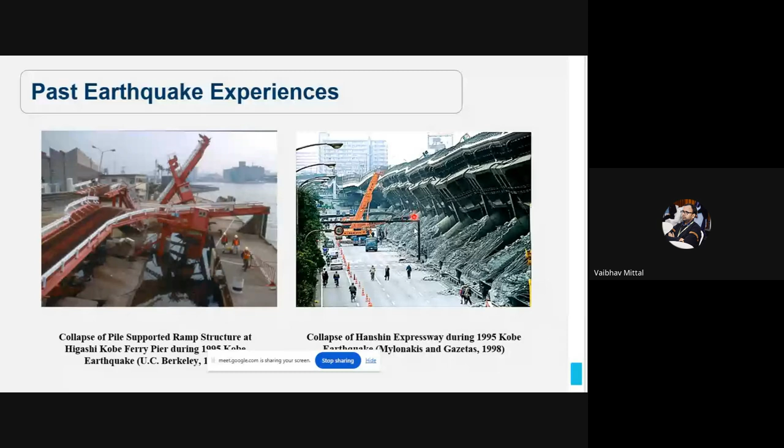Period lengthening means resonance occurred, resulting in the collapse of the Hanshin Expressway. A portion of the expressway collapsed during the Kobe earthquake. Similar observations were seen during the 2015 Nepal earthquake, where non-consideration of foundation effects caused buildings to collapse.

So what is this exercise basically? So far I was talking about experiences from previous earthquakes. Now, what do we basically do? This is the conventional approach which we used to follow.

Whenever we design any structure, we design it by assuming a rigid condition, meaning we consider it as a rigid base. But in actual conditions, are these the same? No, they are not the same, because the available soil condition, the foundation system, and the stiffness of these two bodies are completely different from the rocky strata.

Suppose an earthquake comes in this case, and an earthquake comes in the other case—then the response of our structure will be completely different in comparison to the other one.

The performance of the building is basically obtained on the basis of the FEMA code. FEMA code says that the performance level of a building can be specified on the basis of qualitative and quantitative levels. The term used to describe the performance level quantitatively is interstory drift.

They have given certain values for interstory drift, based on which we can decide whether the building is safe or not. They have given 5 performance levels: fully operational, occupational, life safe limit, collapse, and nearly collapse condition. It is observed that as per the code, if the interstory drift of the building crosses 1.5%, it is said to be under the life safe limit.

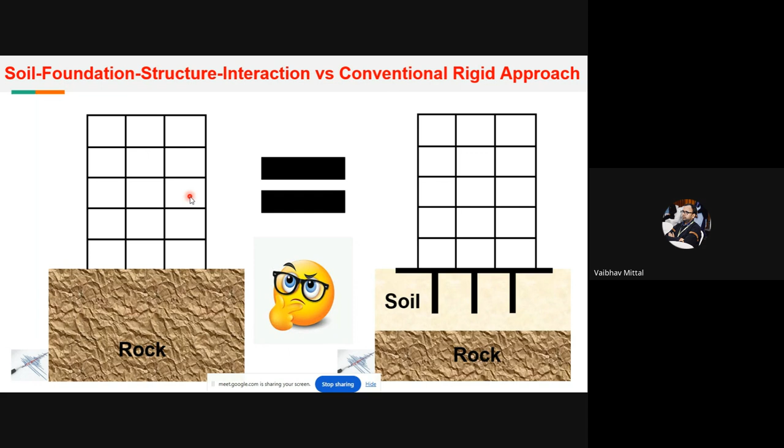And if it is crossing more than 2.5%, it is under collapse condition. This can be understood from the next slide also, more properly.

Because in this case, the stiffness of rock is very high. If stiffness of rock is very high, it will not lead to development of transverse shear and overturning moment. That is why the building response is found to be safe.

But as soon as soil will come into picture, what will happen? Depending on the frequency content and characteristics of the soil, amplification may occur.

Now suppose we are doing an excavation here, for a foundation system. As soon as you are doing excavation, what will happen? Just picturize this one in your mind.

Suppose your foundation is there. The soil will try to do a certain response, which is basically the free field response. So soil will try to follow a free field response.

But due to the stiffness of the foundation, it may not follow this free field response. The inability of the foundation to follow the free field response is known as kinematic interaction. Once we are considering the inertial effect of the structure and foundation, then what will happen?

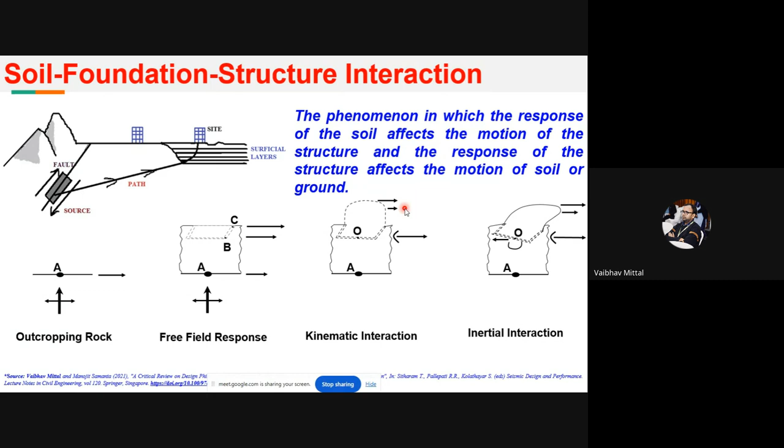So basically, these two interactions, kinematic interaction and inertial interaction, are two types of soil foundation structure interaction. So what is soil foundation structure interaction? The phenomena in which the response of soil affects the motion of structure and vice versa is known as soil foundation structure interaction. This can be understood from the animated slide we have made.

Because due to development of overturning moment, this foundation will rock. So rocking of foundation is basically playing an important role in the increment of lateral displacement of the building.

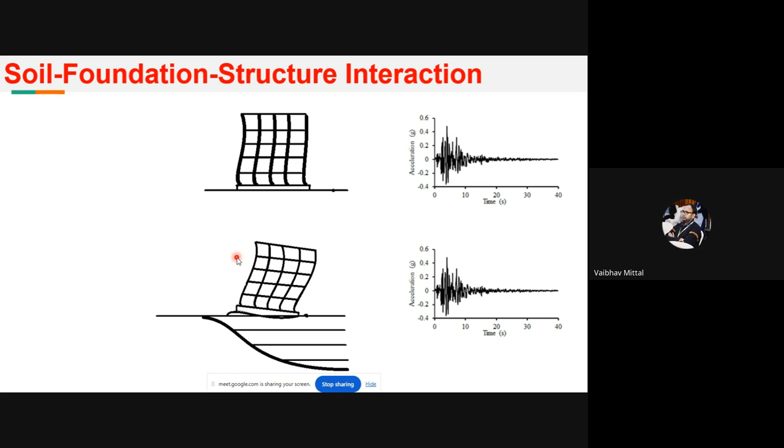So what are the several parameters which are affecting this response? First is the foundation, under the available site condition, the configuration of structure, because this is a regular structure. If irregularity is there in the building, again SSI will be more in nature. And also the input ground motion.

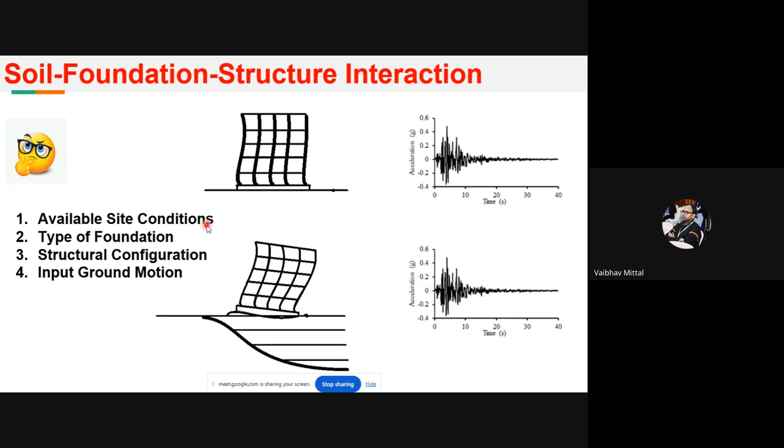So there are several other parameters like local site effect. If I'm talking about the single point, local site effect is playing an important role in influencing the seismic response of the system, that is basically your structure and foundation. Now coming to the codal provisions.

So regarding the Indian code, IS 1893:2016, as per clause 7, it states that SSI may not be considered for structures supported on rock or rock-like material under any earthquake disturbance. For this consideration, they have given a time period equation for a moment resisting frame building, that is an RCC building: T equals 0.075 h raised to the power 3/4. This is the equation given by the IS code.

But as we know, India is a developing country, and due to increase in population and urbanization, we won't everywhere get a rock-like condition. So we need to construct structures where soil is present. How do we consider this in design? This can be understood in the next slide. I will show the general approach first, then come back to this slide.

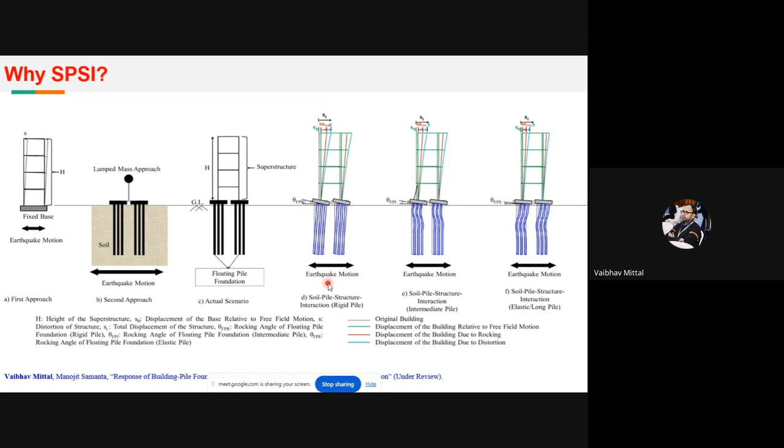Now suppose this is a single structure, and I am designing it corresponding to this lateral displacement, with another structure adjacent to it - this may cause a pounding effect. It may affect the surrounding structures and also its own performance. That is why we should consider the effect of soil-foundation-structure interaction - instead of designing the structure and foundation separately, we should develop a methodology using coupled analysis. That is the importance of SSI over a rigid stratum.

Now coming back to the previous slides I was mentioning. The Indian code is basically silent about all these things. Although the new drafted code has given certain guidelines, there are still several things that need to be considered. Another code, ASCE 7-16, talks regarding SSI - a few points they have considered, like mentioning where we should consider the effect of SSI.

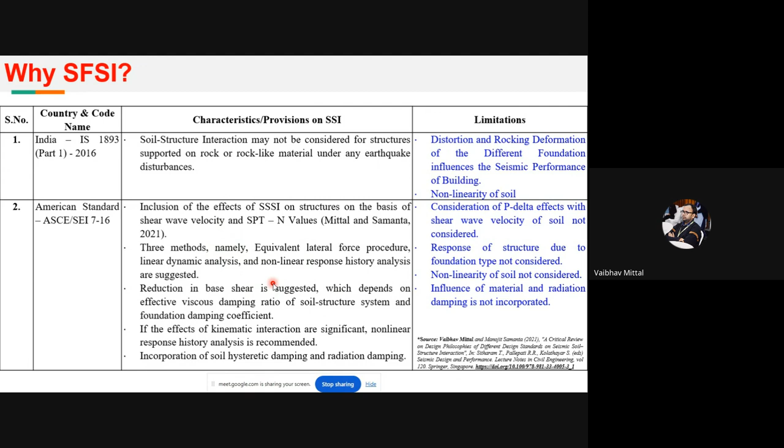They have also given a few methods, but if a building is supported on an isolated footing, a raft footing, or a pile foundation, depending on the foundation type, the structural performance will change. How the foundation affects the structural response is not being considered in the ASCE code. This was the reason I conducted this research using experimental investigation and numerical investigation, that is Abaqus.

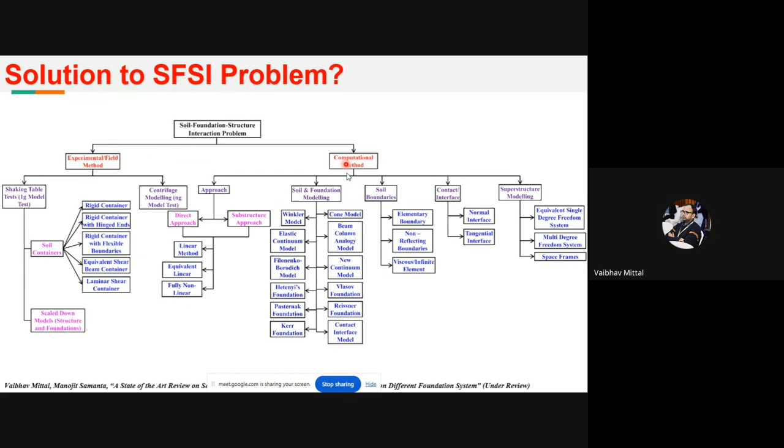So what are the solutions to the soil-foundation-structure interaction problem? There are two methods: experimental method and computational method. In today's class, we are going with the computational method, that is also the direct approach. So we will go to the direct approach.

What is basically direct approach? In direct approach, what we used to do - now in actual condition, soil is wide, soil is an infinite media. But whenever we are doing modeling in Abaqus or any finite element software, we are using a finite media. So in direct approach, we will construct this structure, foundation, and soil in a single system.

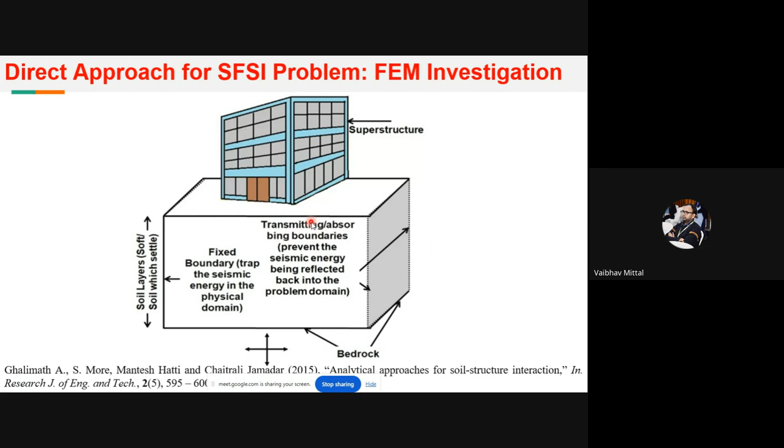However, in case of substructure approach, there are two approaches: direct approach and substructure approach for an SFSI problem. In substructure approach, instead of modeling this complete system in a single body, I will discuss in more detail in the upcoming slides. That is why I have discussed this one briefly, because this is the aim of today's webinar, and we will discuss it in more detail later.

In substructure approach, what we are doing - this is my complete solution. So first, in the first approach, I will not consider the mass of the foundation and structure. I will just follow the kinematic interaction, meaning I will try to find the foundation input motion.

Once this foundation input motion has been obtained, then in the second step, I will try to find the impedance functions. These impedance functions and foundation input motions are applied at the base of the structure to obtain the seismic performance. So this is the substructure approach.

Now, people can ask which approach is better. If you are following a direct approach, the computational time will be more. If you are following the substructure approach, computational time will be less.

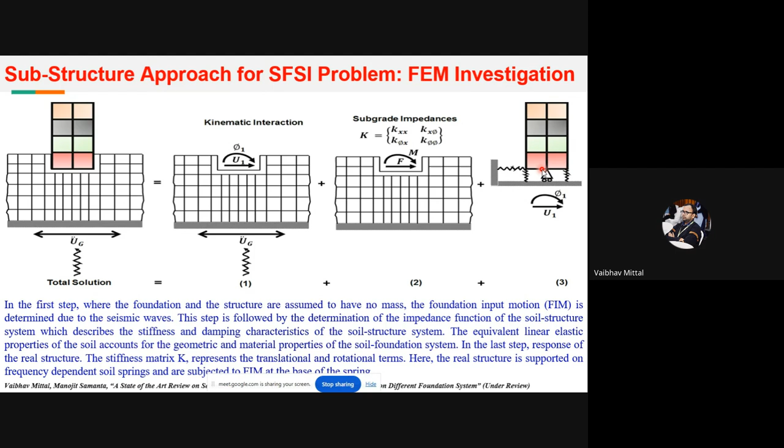But again, although we are using this kinematic interaction, foundation input motion, and impedance function at the bottom of the structure, we are still missing the foundation effects because there are shadowing effects, and how the foundation will interact is not fully captured. So these things are not considered in the substructure approach. That is why the direct approach is generally more widely considered for solving SFSI problems.

So this I have already discussed. Now moving to Abaqus numerical modeling. First of all, whenever you are doing any Abaqus modeling or finite element modeling - whether it's a structural engineering problem or just a geotechnical problem - Abaqus does not know which unit you are using. If you enter anything, it will just give you the numerical value; it does not know what unit you are entering.

So it is the user who should understand what unit system to follow. For example, if I am following SI units, length should be in meters, force should be in newtons, mass should be in kilograms, time should be in seconds, stresses should be in newton per meter square, energy should be in joules, and density should be in kilogram per meter cube.

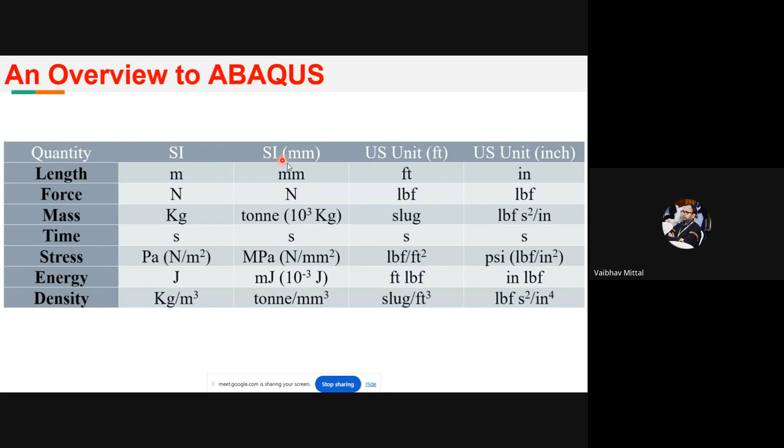The common habit of a geotechnical person is to use kilonewton per meter cube for density, but we should use kilogram per meter cube in Abaqus. If you are modeling in millimeters, then your density should be in ton per mm cube, mass should be in tons, and stresses should be in megapascal. These are the unit systems you should keep in mind whenever doing any modeling in Abaqus.

Once you open your Abaqus model, it will look like this. This is the toolbar. Abaqus has several features, and the first one is basically Parts.

Since today we are dealing with a soil structure interaction problem, we have several components - the superstructure, the substructure or foundation system, and the soil. So in Parts, we will create these separately.

Then after that, we need to assign the properties, and in the Assembly module, we will assemble them completely. Then we need to follow the Steps function - Steps meaning what kind of study you are going to do. For example, if you want to perform dynamic analysis, you need to provide a dynamic step.

If you perform a static analysis, you should define your steps here. In field output request, we need to select the variables. Like if I want displacement, I will select U. If suppose I want acceleration, I will select A. So whatever variables or results I want, I will select in field output request and history output requests.

Then in interaction, we will define the interaction, meaning the contact, because there is a foundation, there is a structure, and there is your soil. So what we need to do is define the contact between the foundation, the soil, and the structure to simulate soil foundation and structure interaction problem in Abaqus.

Then your next step is your loading. In loading, whatever different kinds of loads are there, you need to assign those. And then you need to assign your boundary conditions. Then we need to do the meshing. Once all these things have been done, we can run the analysis. And after running the analysis, we will get our results.

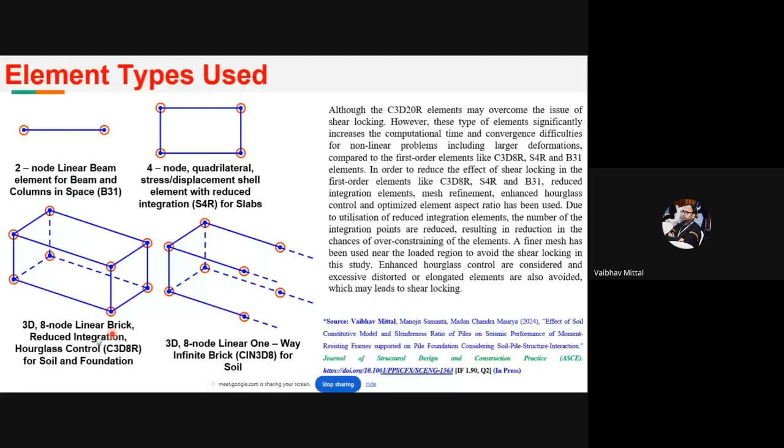Another thing is we are using different types of elements like reduced integration, hourglass control. These are different things which we should consider in Abaqus. These details can be obtained in one of my papers, already published in the Journal of Structural Design and Construction Practice. You can see this paper to understand the usage of reduced integration and hourglass control for modeling in Abaqus while doing any SSI problem.

Now moving to the first part, how a superstructure has been modeled. So in the superstructure, how do I need to model that? I will use 3 things. First is your beam, second is your column, another thing is your slab. So I need to model 3 things.

As I mentioned, beams and columns are modeled using 2-noded linear beam elements with 6 degrees of freedom, while slabs are discretized using quadrilateral shell elements with reduced integration.

Another thing is that in this study, whenever you are doing any superstructural modeling, you need to provide certain properties. So you can provide linear elastic properties, or you can also assign plastic properties. But in this study, I'm only providing the linear elastic properties. If someone wants to assign plastic properties, they can go with concrete damage plasticity, if they want to see how the damage occurs.

Another important point whenever we do any such studies is the damping ratio. As per IS 1893 code and ASCE 7-16, I have taken a damping value of 5%. So a structural damping of 5% has been taken, depending on the study by Chaudhary and Dasgupta, which is why we have taken this 5% damping.

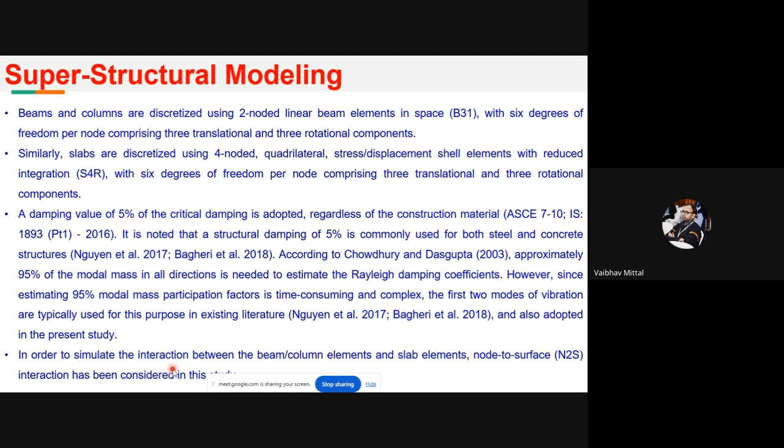Another thing is that when we have modeled these beams, columns and slabs separately, we need to provide an interaction between them. For that, we are using a node-to-surface interaction between the column and slabs. And once we have done this, we get a modeling like this one.

So you can see these are linear elements. These are the beam elements we have used for the column, and similarly for the beams. And then these slabs are resting over this. So what we have done, just try to imagine this thing.

I will use a pen here to make you understand. So suppose this is your frame, any frame. I am supposing I have taken one frame, and I will change the color also. Suppose this is one, here's one slab.

So basically what we have done, we have taken the connections here. This interaction we have provided between beams and columns, and another interaction is provided between this surface. The red color is for your beams, and the blue color is for your slab. Between this we have provided an interaction.

For that interaction, basically what we are following is we don't want a relative motion between them. So if you do not want any relative motion between them, you should provide a tie constraint facility available in Abaqus. This tie constraint is basically used if you do not want any relative motion between different parts. That is why we are providing the interaction as node to surface.

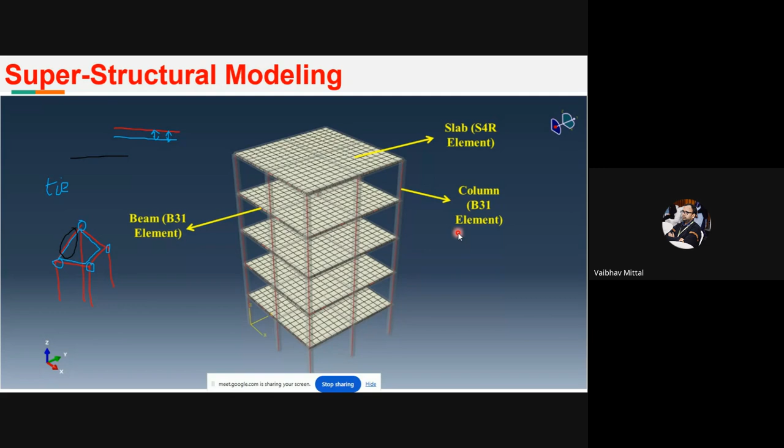So what is the reason behind that? That is also being investigated in the study.

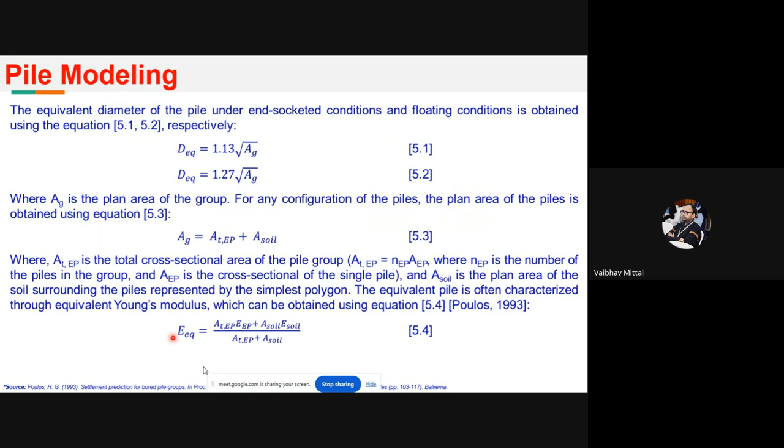Another thing is, whenever doing this kind of study, basically what we are doing is avoiding the shadowing effect. To avoid this, we have taken equivalent Young's modulus also, obtained from this equation. So these two properties have been taken for pile modeling, and we have modeled it like this.

Now, whenever we are doing any pile modeling, we should know there are several things we want to know: the bending moment, the shear force, the lateral deformation. Now this is the disadvantage, if we can say, or there are several ways by which we can do this modeling in Abaqus.

You can use a wire element, you can use a solid element, but with each type of modeling, there are certain disadvantages involved. Like if suppose I am using a beam element instead of this solid element, what will happen? Obviously, the number of elements will be less.

Then obviously what will happen? If the number of elements are very less, then obviously your computational time will reduce.

But in that case, there is another problem, because the pile is surrounded by soil. There are frictional resistance offered by the surrounding soil, and there are end bearing resistance that cannot be modeled when using a beam element. So if I am using a beam element, this is the benefit and this is the disadvantage.

Another benefit with beam element is: if I am using beam element, I can easily find the bending moment, shear force, lateral deformation, everything. But we cannot simulate the interaction between the surrounding soil and the pile.

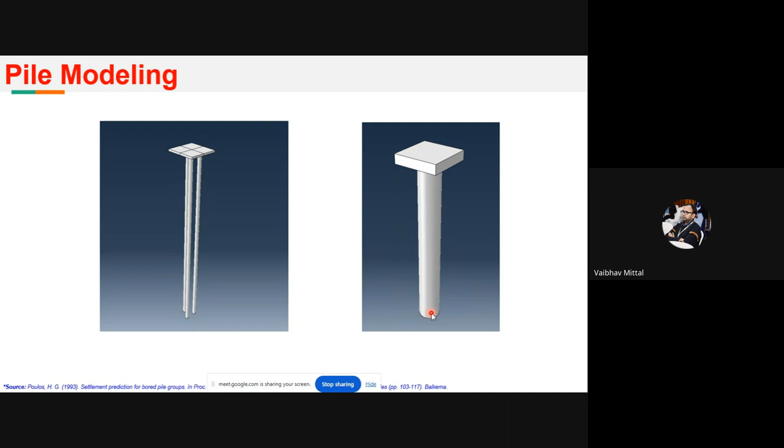Or to overcome this, there is a technique where we use a combination of beam element and volume element. So what we are doing is modeling the pile foundation as a volume element, and to find the bending moment and other things, we are using a beam element, which we embed in this solid pile.

For that, we need axial rigidity and flexural rigidity, which we assign, so that the pile can simulate the interaction, that is the frictional forces and end bearing resistance, and we can also get the bending moment. So for the volume pile, I'm using this element.

So once we have done the modeling, you will see this. The outer one is basically your volume pile, and to estimate the bending moment and other things, we have embedded a beam element inside this one.

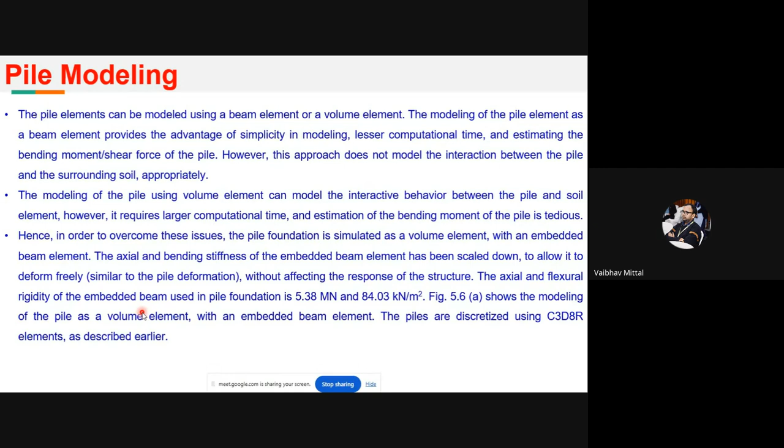The beam element properties are: the axial rigidity and flexural rigidity of the embedded beam have been assigned, so that this embedded beam is also deforming similar to the pile only. So in this way, we have done the modeling of pile in Abaqus. This is the pile modeling you can see.

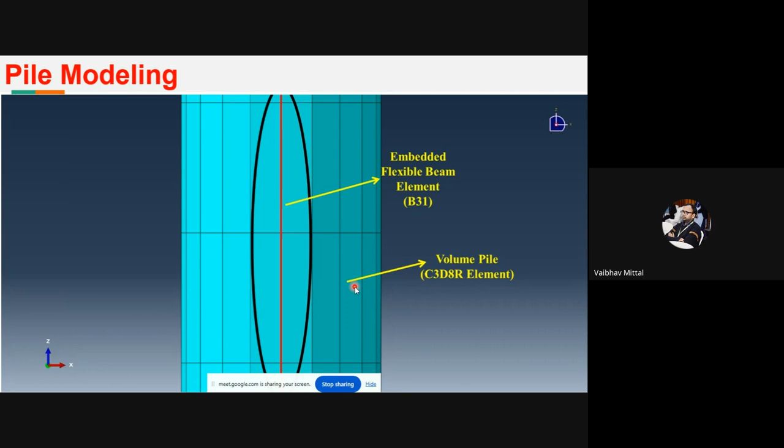Another thing that might come to your mind is how pile foundation modeling will be different from pile raft. We will see in the upcoming slide how that modeling has been ensured, how I have ensured these piles are behaving, means these caps are not taking any load, because in pile raft we know a small amount of load will be taken by raft and another amount of load will be taken by piles.

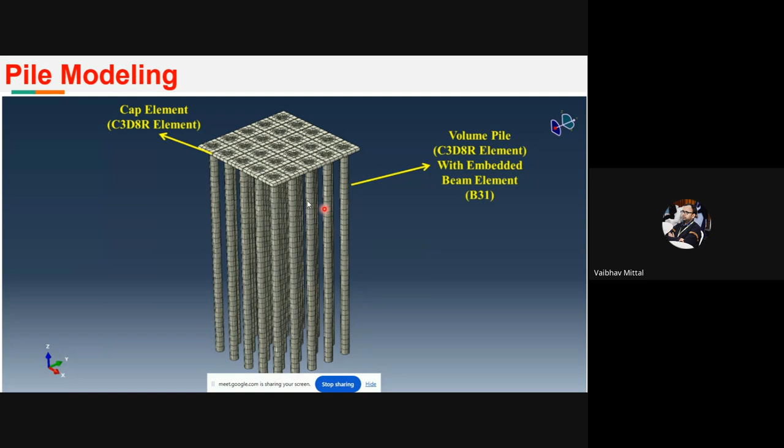In case of pile foundation, all the loads are generally taken by piles only. How this action has been ensured in Abaqus, we will see in the upcoming slide.

Whenever doing soil modeling, the common methodology is to use constant Young's modulus values, without considering dynamic characteristics. But in actual conditions, during an earthquake, depending on the characteristics of the earthquake, the strain level will differ, and depending on strain level, there will be degradation in the soil, and its damping ratio will also change. So we should consider this non-linear characteristic of soil.

Whenever doing any dynamic study related to soil, we should consider the shear modulus degradation curve, and we should consider the damping degradation, that is the damping variation with respect to cyclic shear strain.

For that, we have developed the UMAT model with these different parameters, through which the non-linear characteristics of the soil have been incorporated in Abaqus. Proper calibration has also been done before using this soil model for my study.

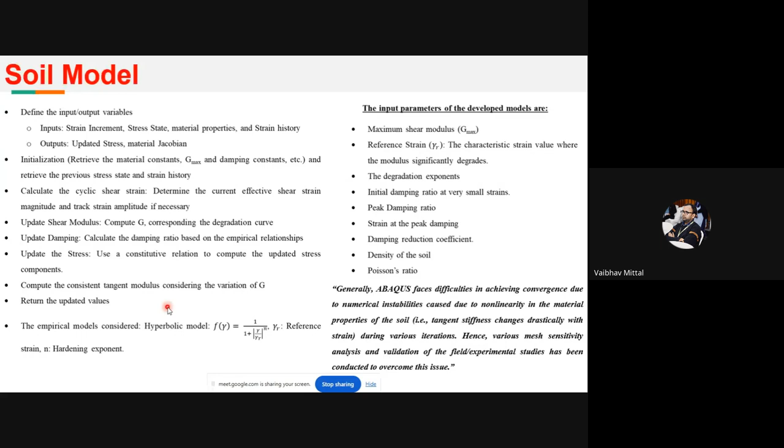As mentioned, we are using a dynamic study, so for that I have taken these 4 different types of earthquakes. Today in this class, we are going to discuss only the Imperial Valley earthquake.

Whenever doing any kind of study in Abaqus, one should ensure that whichever earthquake data you are using, it should be recorded at bedrock level, not at the soil level. Because if you take data recorded at the soil level, it will already be amplified. So if you have data from soil level only, you need to perform deconvolution to get the raw data.

All this data has been obtained from PEER, which is a strong motion data database where you can get these records. We have taken 4 different datasets: Imperial Valley, Chichi earthquake, Tohoku earthquake, and Kobe earthquake.

Why have I taken these 4 earthquakes? Because there are several parameters - intensity, duration, hypocentral distance, magnitude - that will affect the seismic performance of a building. Depending on that, we have taken these earthquakes.

If I'm providing the full duration of each earthquake, it will take so much time. Instead, there are two things you can do - either provide significant duration in Abaqus, or provide bracketed duration. In my study, I have used bracketed duration.

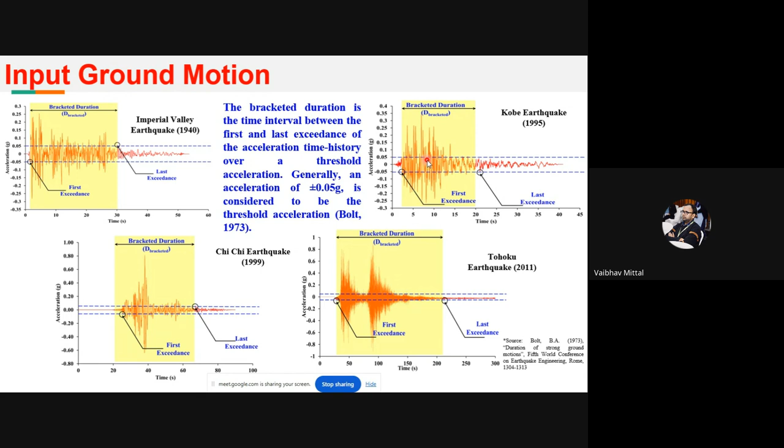Whenever doing any modeling in Abaqus, we understand we will create different parts - a foundation, a structure, and soil. Now another thing is how we decide the interface. In the structure, I showed you that the interface is done by providing a tie constraint.

But in case of piles and surrounding soil, a frictional force and an end bearing resistance are present. So what is the ideal characteristic? When separation is zero, there should be no contact pressure.

As soon as there is no separation, meaning the pile is touching the soil - keep in mind this is shown at a microscopic level, which is why you see a gap here, but there is actually no gap available. So what basically is the ideal characteristic?

When you apply the load, what will happen automatically? There is no separation, so the contact pressure should be maximum. But in actual conditions, we can't get the ideal characteristics. So for that, we use this characteristic available in Abaqus.

This characteristic is known as hard surface to surface contact. Since my pile has larger stiffness, meaning it's more rigid than the soil, the pile acts as the master surface and soil acts as the slave surface. To simulate frictional forces and end bearing resistance, we provide hard surface to surface contact using normal interaction, and for frictional behavior we follow tangential interaction using the penalty method available in Abaqus, where we provide the friction coefficient, details of which are given in my paper.

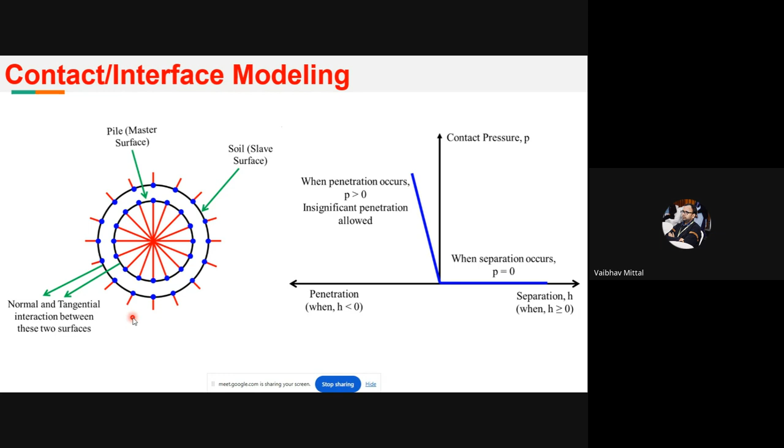The details of the paper are in the last slide of this presentation, so you can get that there. Now this is the complete modeling which I mentioned here.

First, as I mentioned, whenever we do any kind of soil model, we should ensure that the soil is infinite. So in the direction of shaking, we have provided infinite element, CIN3D8, and then for the pile and soil, we provide the interaction as normal and tangential interaction.

One more thing, if you see clearly, this pile cap is above the ground. The major function of a foundation is to transfer the load to the surrounding soil. Since this pile cap is above the ground, it won't transfer any load. So all the loads will be taken by the pile. In this way, the simulation of pile foundation has been taken care of during the modeling.

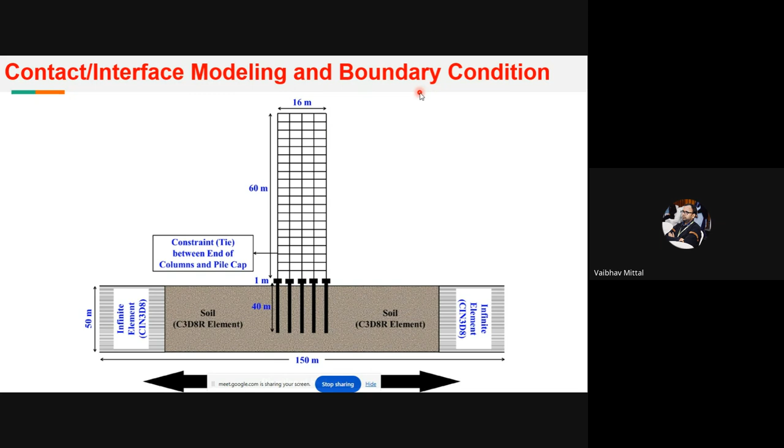In this direction and the opposite direction, out of plane rotation has not been allowed. One major mistake people make when doing soil modeling is using the default view of Abaqus. If you use the default view, the depth will be in the y direction. But what we should do is ensure this is the global XYZ axis, so depth should be in that direction.

Now another point for numerical modeling - so far we've understood the different contacts we need to provide, different properties, and different boundary conditions. Another thing which will influence your computational time is your meshing, so you should perform a mesh convergence study.

But before the mesh convergence study, since this is a dynamic problem, there is a criteria called the Lysmer boundary condition, or Kuhlemeyer-Lysmer boundary condition, corresponding to which we should ensure the mesh size is appropriate relative to the wavelength of the seismic wave. After that, once you have obtained your mesh size...

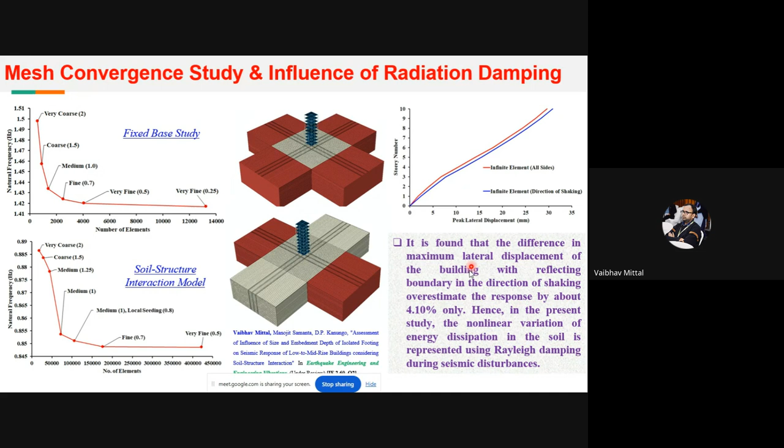Here you can see, although the result difference is very small, about 4.10%, the computational time for this analysis took more than 4 to 5 days, whereas this one I am getting in 2 days only. So instead of using infinite elements in all directions, I will use only the direction of shaking, because the error percentage is still less. That is why I have used infinite elements in the direction of shaking only.

So in this way you can create a model in Abaqus. Now, once you have created your model, you should know your steps. Firstly, you should ensure your geostatic condition, that is your K0 condition, is satisfied or not. Once your K0 condition has been satisfied, before moving to the dynamic condition, we should go with the static condition.

In the static condition, we will assign the weight of soil, the weight of foundation, and the weight of the structure. That is basically applied. One more thing, when using the static step, the first step after the geostatic step: don't assign the frictional coefficient value to your soil, because until an external load is applied, no friction will come into picture between foundation and soil. That is why in the initial condition, a frictionless boundary condition should be there.

Then you should define another step, the intermediate step. In the intermediate step, you will assign the frictional behavior, and in this step you will assign all your dead load, live load, and whichever load is there. Then in the next step, we should define a frequency step for finding the mode shapes and natural frequency. And then in the last step, you can go with the dynamic step.

Now, another thing you can see here is implicit motion. What is this implicit motion? In Abaqus, it will provide you two types of study: one is dynamic implicit, another is dynamic explicit. But in this one, we are using dynamic implicit only. So what is the difference between them? Mathematically, if the independent variable and dependent variable cannot be separated from each other, then those functions are known as implicit functions.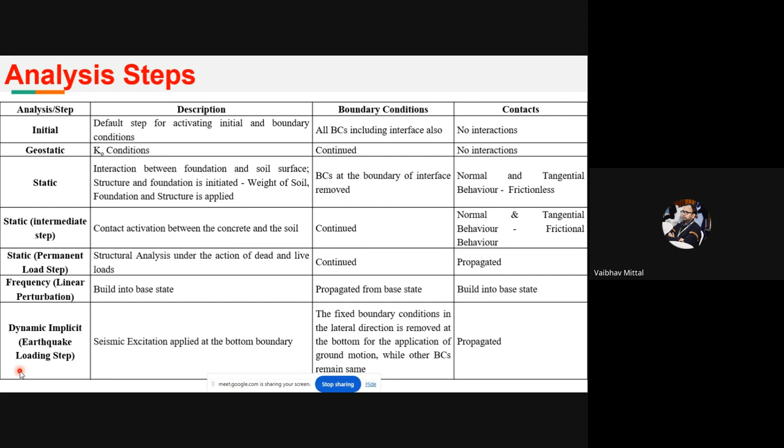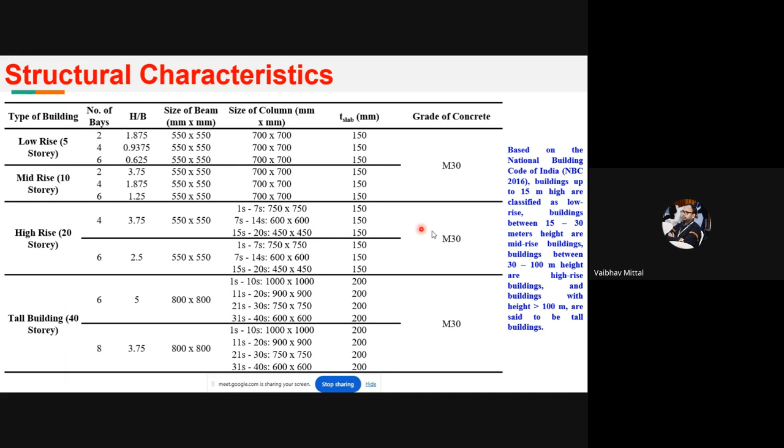In today's webinar, I am using the results for a 20-story, 4-bay building, and all these buildings are found to be under safe condition as per Indian codal provisions. Depending on different load combinations, we have taken concrete grade M30 and a slab thickness of 150 mm. For the foundation characteristics, to find the foundation, we have taken the unfactored load from the unfactored load.

Corresponding to that, we have obtained the column reactions, and then we have taken this end socketed condition and floating pile.

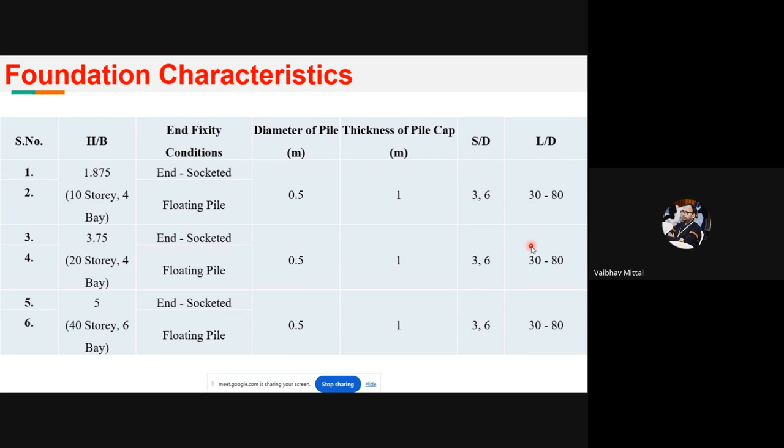There is a common myth that if people want to improve the performance of a structure, they say increase the length of the pile. But always increasing the length of the pile may not be a proper solution. In case of floating pile, that is observed in my results also. So that is why we should see whether we should provide a larger length or not. That is why we are mentioning that the coupled study should be performed.

Another thing is that whenever we are doing any nonlinear study, whether for industry purpose or academic purpose, we should consider the nonlinear characteristics. Another good thing is that if you would have seen the new codal provisions of IS 1893, the draft one which has come, they have given the modulus reduction curve and damping curves, which are basically taken from Vucetic and Dobry.

This is the result of my own data, Solani River sand, sandy soil I have used. The details can be obtained in this paper, which is already published in Geotechnical and Geological Engineering. So the important thing is that in our code also, this data is now being included. They have been using the Vucetic and Dobry curve, and for the corresponding different plasticity, they have given how the shear modulus reduction curve and damping curve will vary.

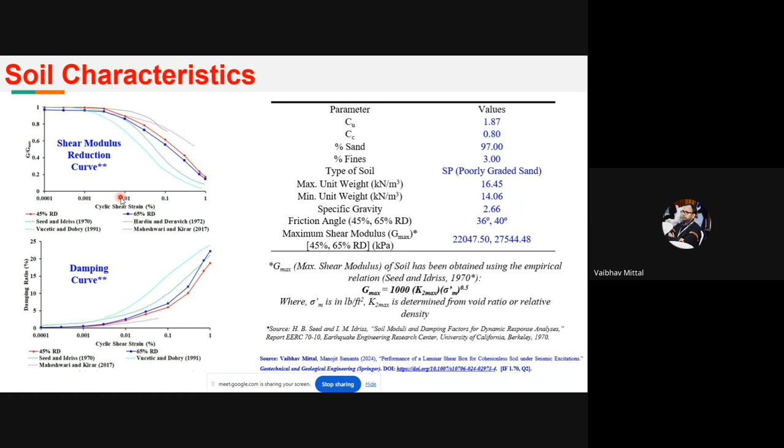Corresponding to these soil characteristics, foundation characteristics and structural characteristics, we have done the model which I have shown you previously, and then we obtained the results. So you can see how the mode shapes of the building are varying.

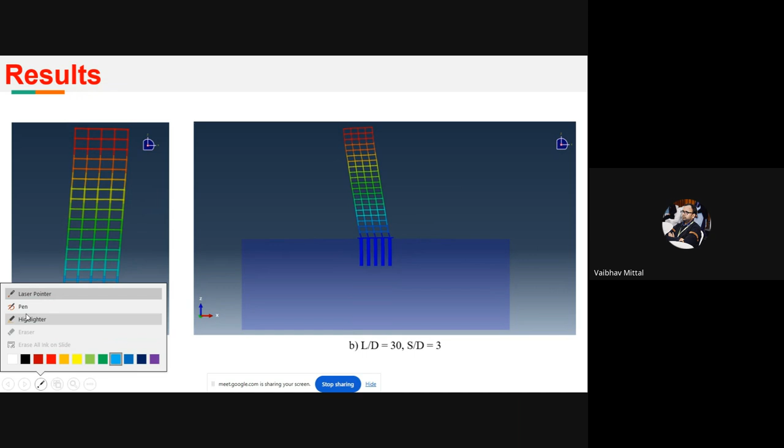If you see the first mode shape, keeping a reference line in this direction, you can see corresponding to this line, something like this is the displacement. But in this one, corresponding to this deformation, you can see this deformation is larger than the above one.

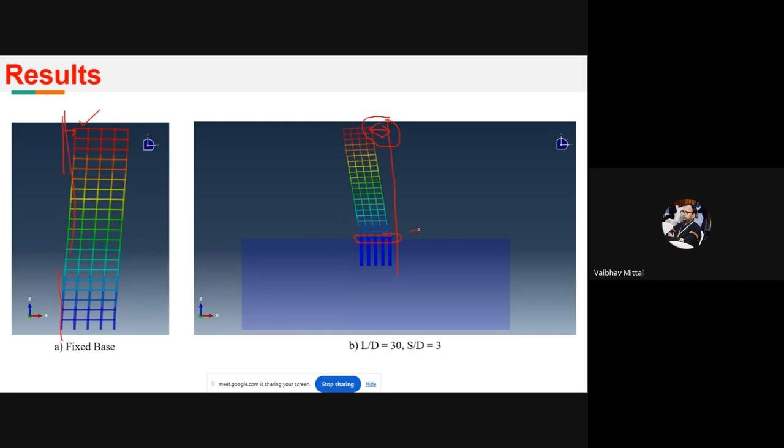This can be understood from the previous first slide where I showed you, because this foundation is basically doing rocking, meaning it will tilt like this. Due to this tilting, the deformation of the building will increase, which can be observed from the time period results also.

For a fixed base, you can see the time period is 1.446 seconds. But as soon as I am using a foundation, any foundation L by D 30, 60, 80, whichever foundation system, there is an increment in the time period. As I mentioned, during the Mexico City earthquake and Kobe earthquake, period lengthening takes place.

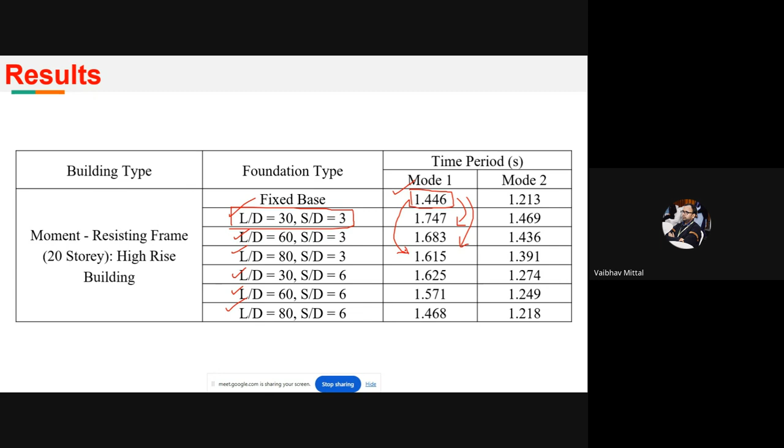If I use this equation, T equals 0.075 h raised to the power 3 by 4, I will get a value near to this one. But in actual condition, the time period is this one. So imagine an earthquake is coming, and the fundamental period of that motion lies in this range of seconds.

So what will happen? There are chances of resonance. Because we have designed a structure corresponding to this data, but in actual condition, the building's fundamental time period is this one. So there are chances that if the fundamental time period is increased, the natural frequency is reduced. So if natural frequency is reducing, what will happen? Now you see what are the different parameters involved. In fixed base design, we design the structure corresponding to base shear.

So what will happen? Suppose the base shear is X kilonewton. We have designed for X kilonewton without considering the effect of soil-structure interaction. But in actual condition, when this coupled system is considered, this base shear is reduced. It may be Y kilonewton, and this Y will be very, very less than X.

This methodology is also given in ASCE. In ASCE 7-16, if I correctly remember the chapter, I think chapter 20 or 21 is on SSI. There they have given that we should not use the base shear which is directly obtained, like we used to say V equals AH into W, that is seismic weight and the acceleration coefficient. In this, we are not considering the effect of structure and the coupled system. That is why they are saying we should modify this, and design the structure corresponding to the modified base shear. So this is the importance of SSI.

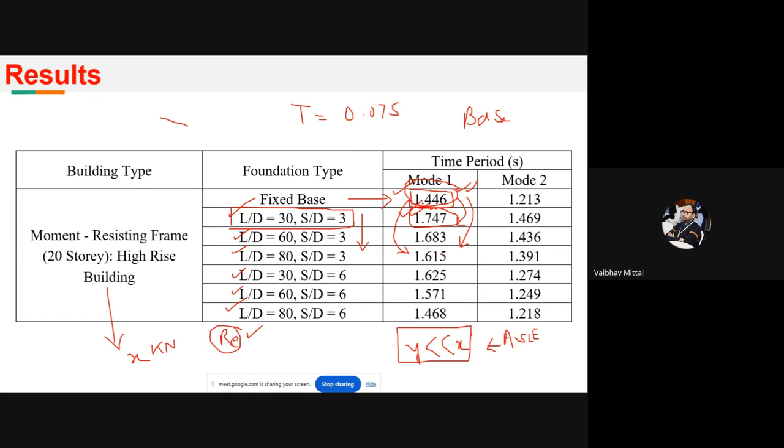So why is this phenomenon occurring? One other thing you can see here, when I'm increasing the length of the pile, you can see reduction in time period. Obviously, the larger the length, the greater the resistance offered from the surrounding soil. So overall stiffness will be increased. If overall stiffness is increasing, your rocking will reduce. If rocking is reducing, performance of the structure will increase.

That is why if slenderness ratio of piles is increasing, the performance of the structure increases more. This can be observed from the results for floating pile and socketed pile. In case of floating pile, as I mentioned previously, this is a common belief: if you increase length of pile, lateral displacement of building will be more safe. But what you observe here is that lateral deformation in case of floating pile is still increasing till a particular value of L/D equal to 60. Beyond that, it is reduced. So just by assuming blindly, we should not increase the length of pile.

Why does this phenomenon occur? Because of the flexibility. In floating pile, there will be no end bearing resistance, or it will not be as high compared to what we get in case of end socketed pile. In end socketed pile, frictional resistance is also more and end resistance is also very high, so the deformation of building is very less. But it is very tough to obtain rock wherever you are constructing a structure, so whenever you are using floating pile, you should consider the effect of SSI.

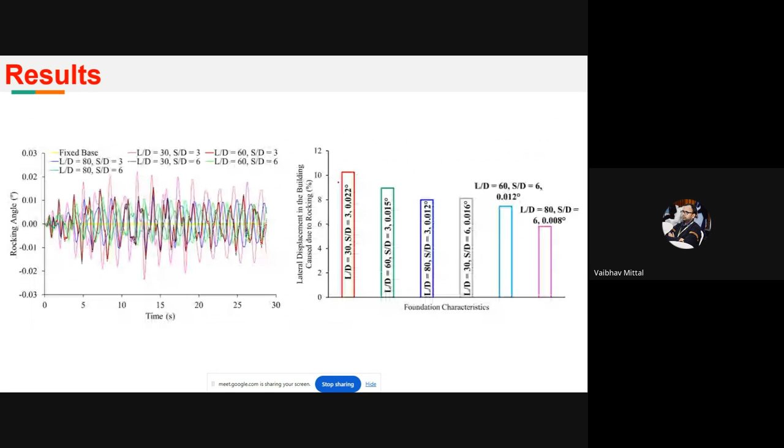This can be understood from one more slide - this is rocking, which I was mentioning previously. What you can see here is that in floating pile, the total lateral displacement of 317 mm - about 58% of this has been caused due to the rocking of foundation. This is something we are generally not considering while designing any structure.

This is the reason why buildings collapsed during the Mexico City earthquake and the Kobe earthquake, because we generally do not consider the effect of SSI while designing. That is why we should consider the effect of SSI whenever doing any kind of study, specifically for high-rise structures or soil of classification D, E and F. In all those cases, we should consider SSI because the performance of the structure will be significantly changed, and it may also affect the surrounding structures.

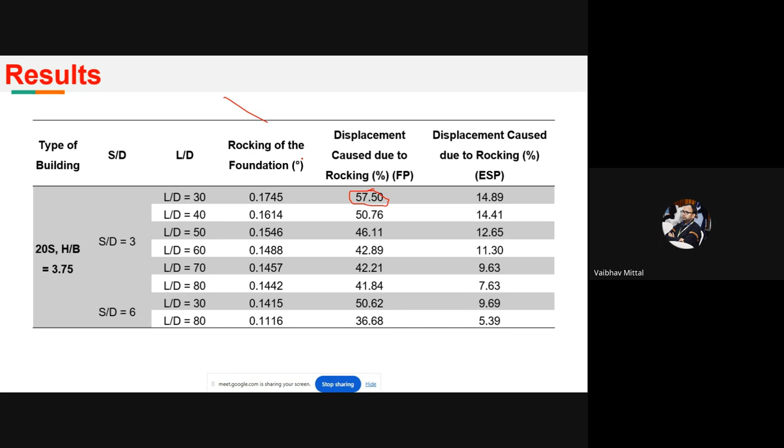Another paper is about to come, in the journal Earthquake Engineering and Engineering Vibration. That one is basically for shallow foundation, whereas this one is for pile foundation.

The remaining other papers are basically on how I have performed experimental investigation. If you want to go for this, you can go with other papers also to learn regarding how soil foundation and structure interaction will play an important role in your seismic design, so that you can get information from these publications of mine.